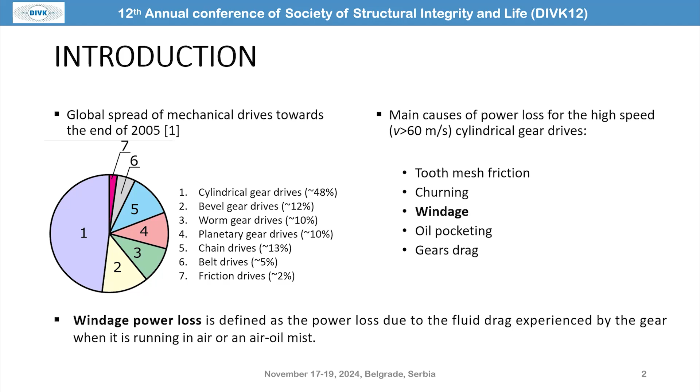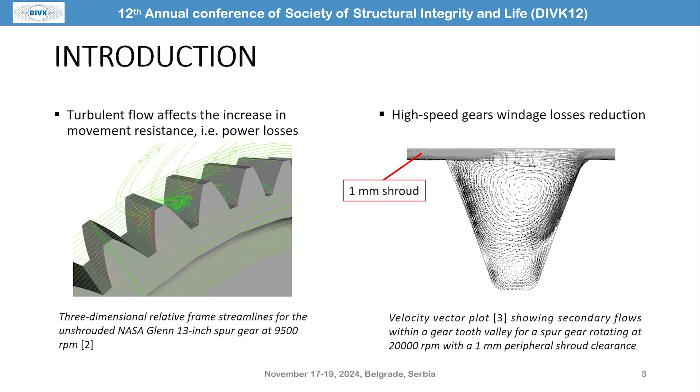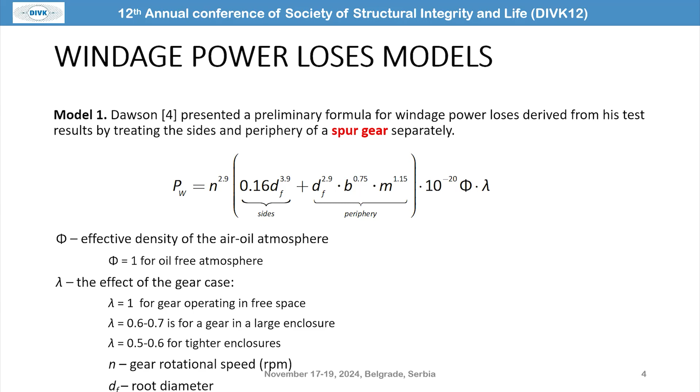So 4 models have been analyzed. The first model, the oldest, is Dawson's model. The model is formed on the basis of experimental results, but those experiments have been made for spur gears. So that can be a problem when you want to apply these results to helical gearing. Here we can see the equation he obtained when testing spur gears, and also the quantities which are taken into account when we calculate the power loss on the basis of this model.

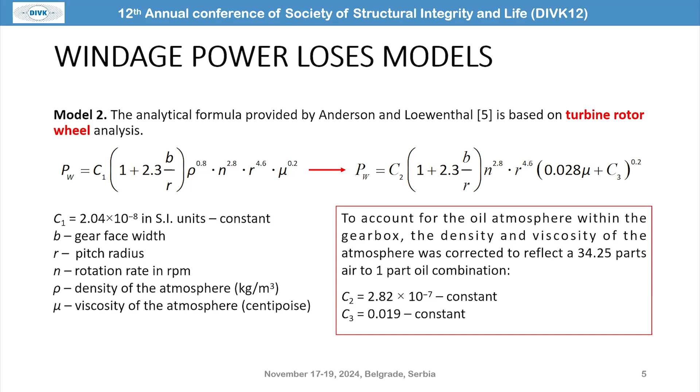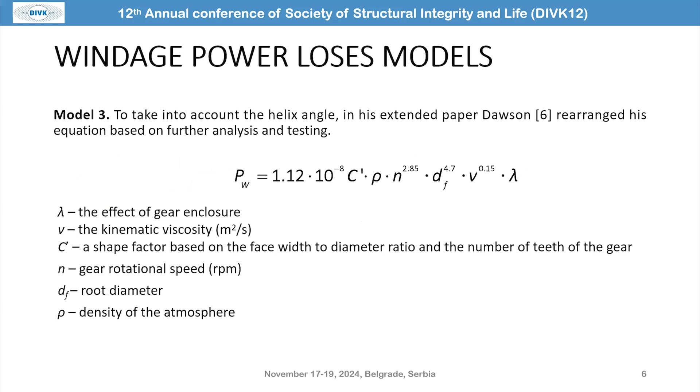The next model was the Anderson and Loewenthal model. It was done for a turbine rotor wheel, also based on experiments, and it takes into account the density of the atmosphere and the viscosity of the mixed atmosphere of oil and air present in the gearbox. The third model is also Dawson's, but in his later experiments he took into account the influence of the helix angle. The basic quantities for this equation, the main gear parameters, are given on the presentation.

The fourth model is the latest one. It is a formula presented by Diab, and it takes into account separate losses for the gear face contribution and the contribution of the gear teeth. The models are somewhat complicated, and I won't lose any time on that. You can see the main influences for every equation.

Now, the application of these models has been done for a gearbox used in the aircraft industry. It's a gearbox of a turboshaft jet engine, which takes the energy from the rotation of the turbine motor. Here is the configuration of the gearbox which was analyzed. I want to point out that the input rotational speed of gear number 1 is 40,000 RPM, a very big rotational speed, which is then transferred to the rest of the gear pairs, so that at the output shaft of the gearbox we have 2,500 RPM.

So that is a two-step big reduction made by the split path configuration of the gearbox. The analyzed gear for this specific analysis was gear number 2, because in addition to high RPM, 10,000 RPM, it also has a big diameter. So we identified gear number 2 as the most influenced by the windage losses, and in the table next to the configuration of the gearbox, the main quantities are given: number of teeth, module, profile angle, helix angle, and stuff like that.

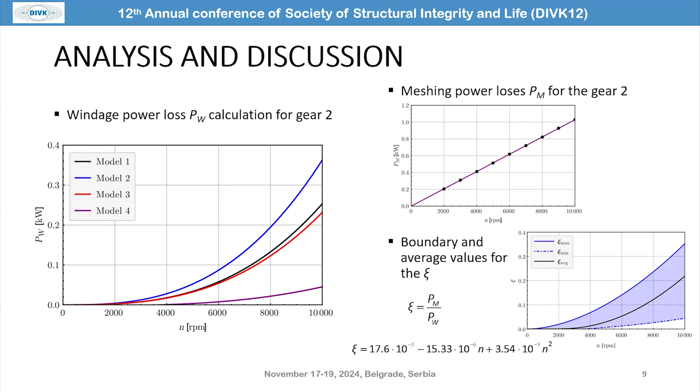So the main conclusions are that we get exponential growth in relation to the revolutions per minute, but significant losses are expected over 6,000 RPM, or a pitch velocity of 45 meters per second. Model number 2 is the most rigorous and gives us the highest windage losses of 360 watts. So we can calculate the expected rise in temperature. In relation to meshing losses, the proportion of windage losses is from about 4 to 34%, but as I said, 20% is somehow expected.

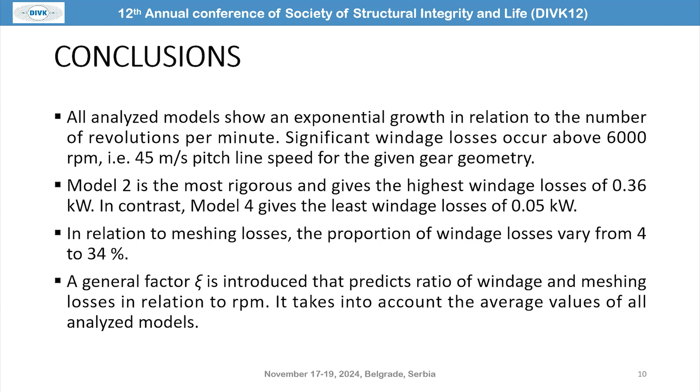And we try to introduce the general factor ξ, which takes into account all analyzed models and gives us the ratio of losses in accordance to the rotations per minute. So in the next phases, we want to test the results. So in that manner, we made some.

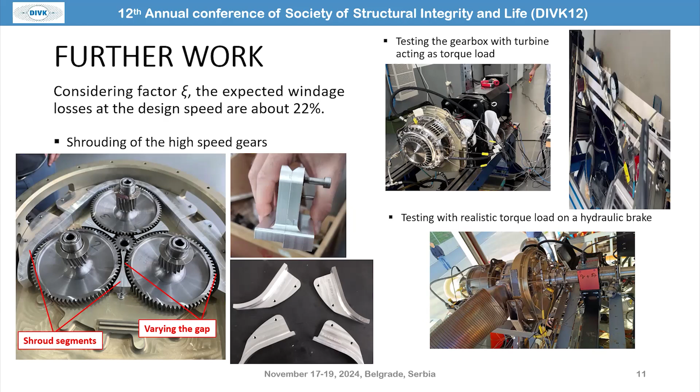And the final testing should be done with the hydraulic brake, where we will definitely confirm whether these calculations are correct or not. So we will confirm if our model gives good predictions. So because I used some references, I gave them